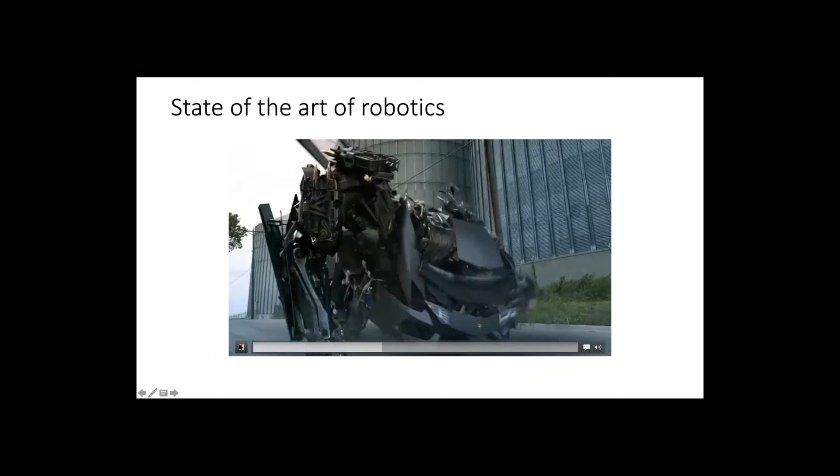So where's the state of robotics right now? It doesn't quite look like that. This is not how the state of robotics looks like right now. This is the fantasy in movies.

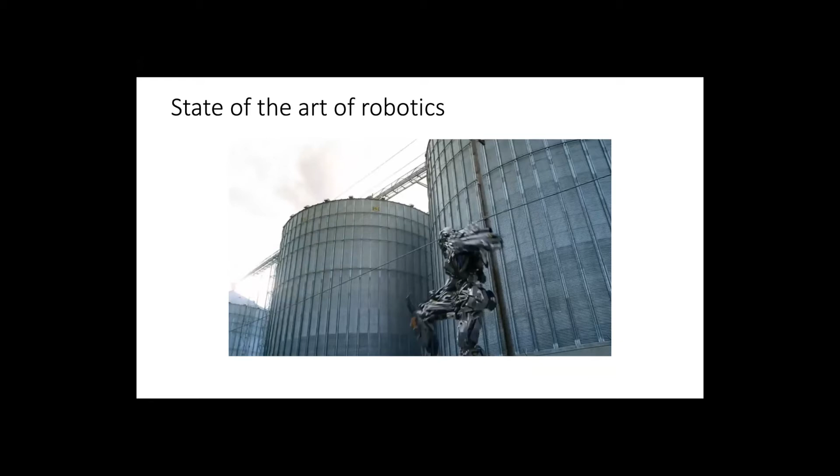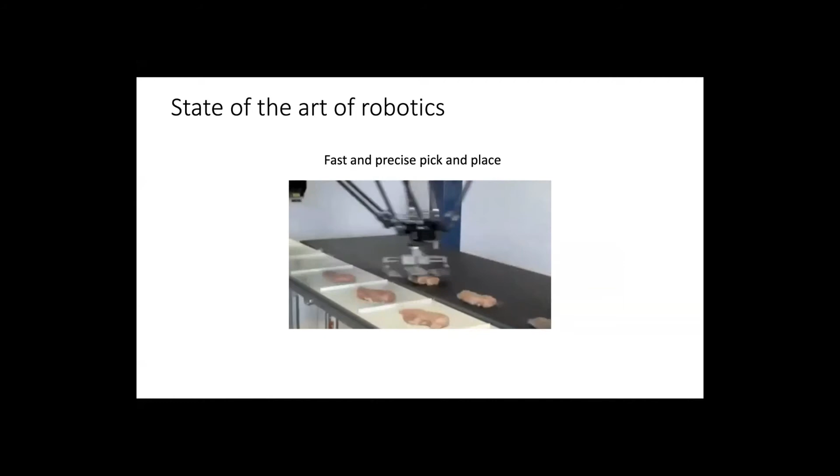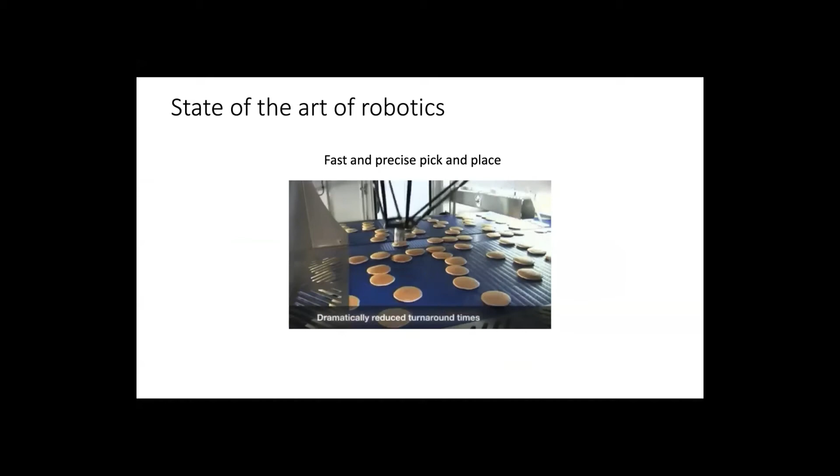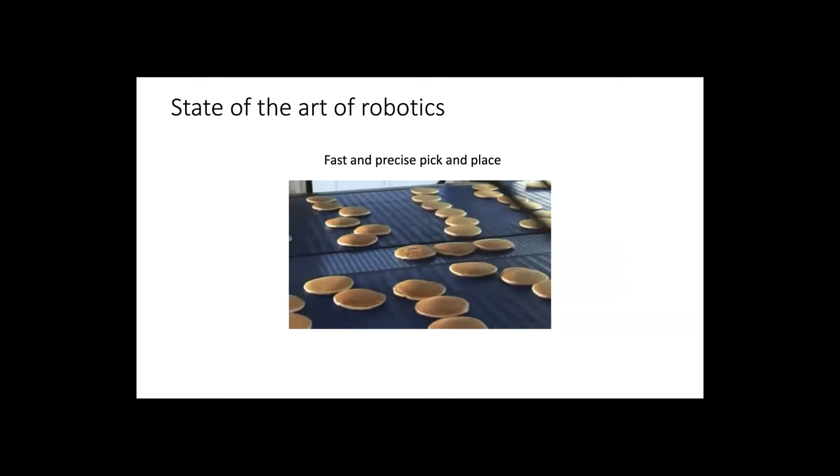Where we are is - this is actually already almost 10 years old, but it reflects the state - we are very good at fast pick and place. Pick and place works superbly, and we have perfected these things for automation, for manufacturing, for ordering, sorting, food industry. So pick and place works well.

More recently, this is what I've seen this year at the big Automation Expo in Anaheim, California, this year in February, shortly before the pandemic broke out. So you can see what's currently available for purchase. You have robot arms that are on mobile units. They can drive around, for example, in a factory floor. You have small robots, they're very precise, they can do very precise pick and place.

And then they can also take into account visual input to pick up something. We have sophisticated end effectors like this robot hand - those kinds of hands right now still more for research. Typically what you have in automation are end effectors like you see in this video, like a small suction cup to pick up something, or a conventional gripper, just a linear gripper that opens and closes. This is still the standard for many things.

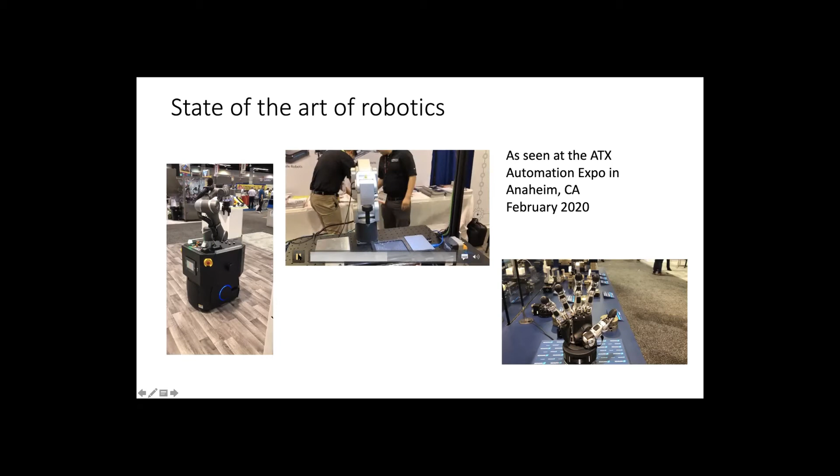And this is one area which is still very tricky - the flexibility of the human hand. Like in this robot hand, we still don't really have it to the point where it's really very reliable and at a sufficiently low cost for manufacturing. So what we do in practice is specially design end effectors, hands, grippers for a very specific purpose, like for example this needle-like end effector for picking up these tiny spheres here.

And then also right now what's happening - NASA built, you've probably seen these fantastic large rovers which are sent to Mars. So currently there's one right now on the way to Mars, about halfway to Mars. It launched earlier this year. And I've seen it being packed up - that's the image on the right, at JPL in February this year, February 6th or so, when it was packed up.

So you see the vehicle, the rover is there. These wheels, they seem tiny on the image, but they're massive wheels, like truck wheels. So this is a very large rover. This just got packaged up at JPL, and then the next day after that picture, it got shipped to Florida, where it was sitting for a while and then got launched in a rocket on the way to Mars.

So it's right now on the way to Mars. Yeah, this is very exciting. So these kinds of robots can drive around, and they have a robot arm, actually two kinds of arms. One is this mast here, which can look around and take pictures of the environment. The other one is a robot arm with a tool head with various different tools, for example, to drill into the ground and to analyze the soil properties.

Because the main question we're interested in is: is there life on Mars, or was there life on Mars, and what did it look like? That's very exciting, because there might have been a separate evolution of life on a different planet, separate from Earth. So there's a lot to learn from there. That's why people are very excited about this.

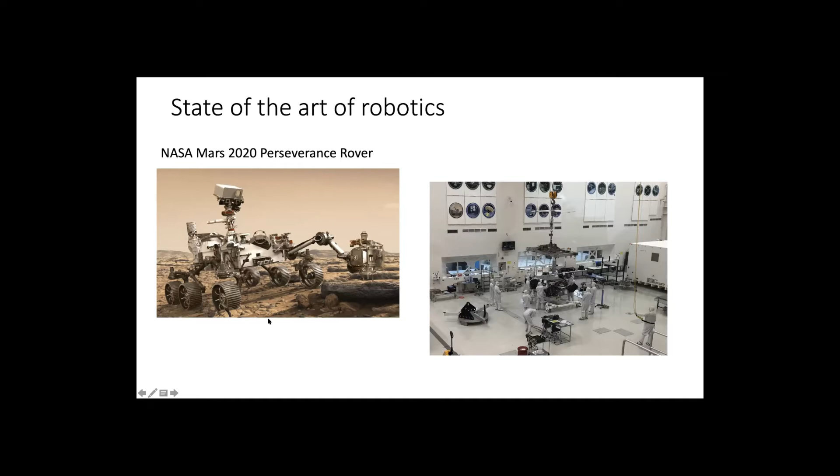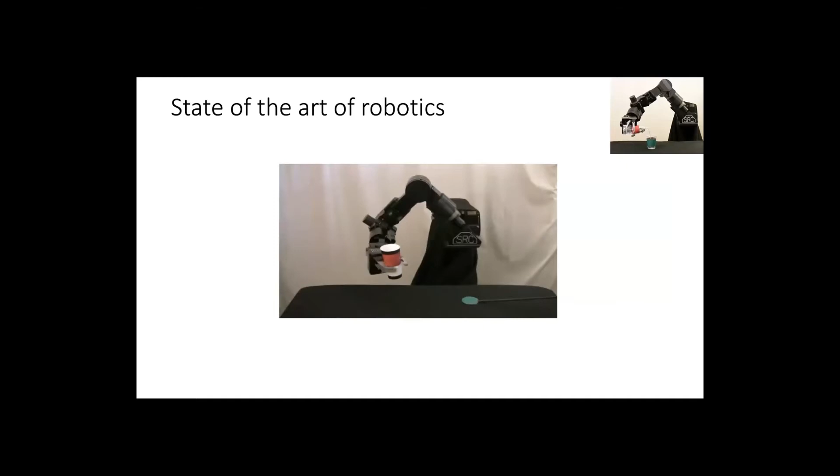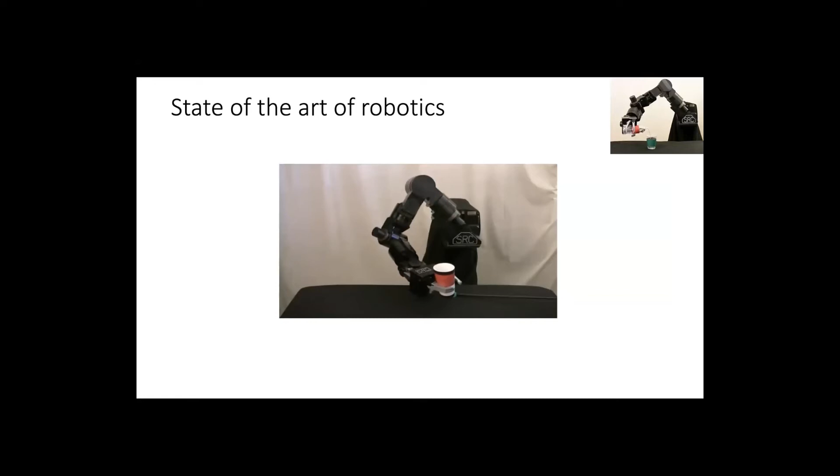So that's another example of the state where we are. So that's one example of what I worked on at USC, one of the works I was involved in. So we created motion plans to execute for the robot. And another thing here was we could create these plans that are very flexible, that adapt to changes to the goal point. And the goal point is here, this green sphere on the table. So we could move it around.

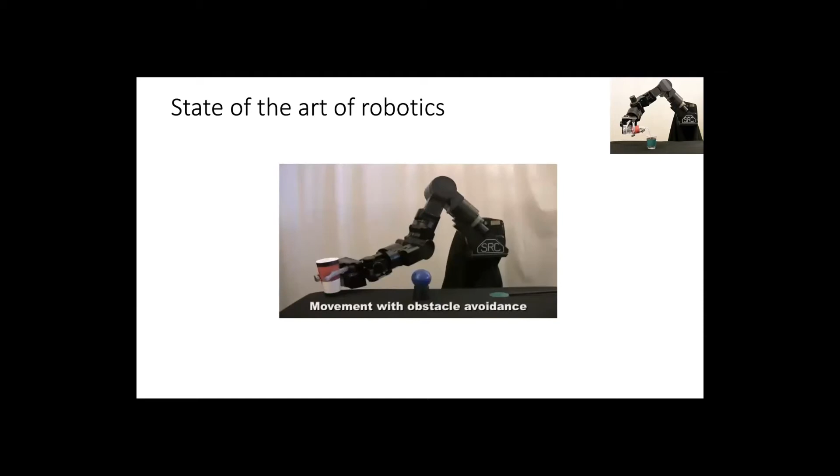So this is an example where the obstacle avoidance is turned off. But when you turn it on, it'll move around the obstacle. And next it shows some more examples of the robot avoiding the obstacle. So you see here how the robot moved backwards to avoid the obstacle, or upwards. And at the same time, the movement plan guides it to this goal, this green disk, and you see it'll adapt to the changes.

The neat thing here, you probably noticed this movement was fairly natural, like humans would move. And there's a reason for that, because we demonstrated this movement with a human, and the robot imitates the movement while at the same time being flexible to adjust to changes to the endpoint. So the new movement planner here can imitate your movement, but at the same time, while it's executing the movement, it's flexible enough to adjust to different endpoints.

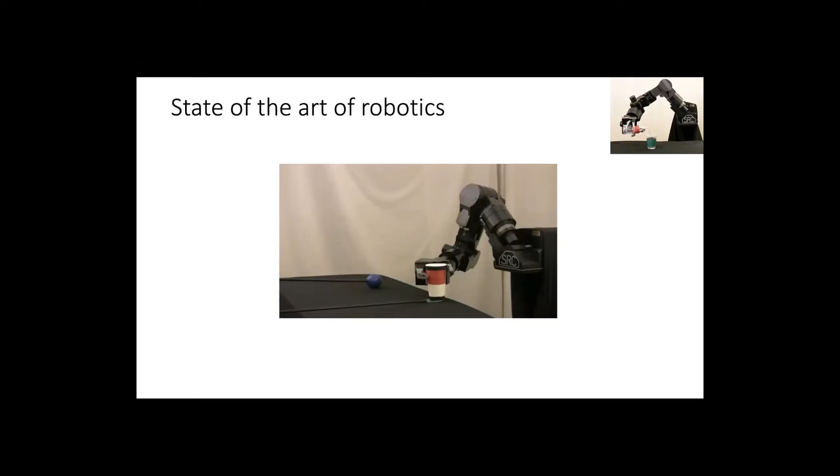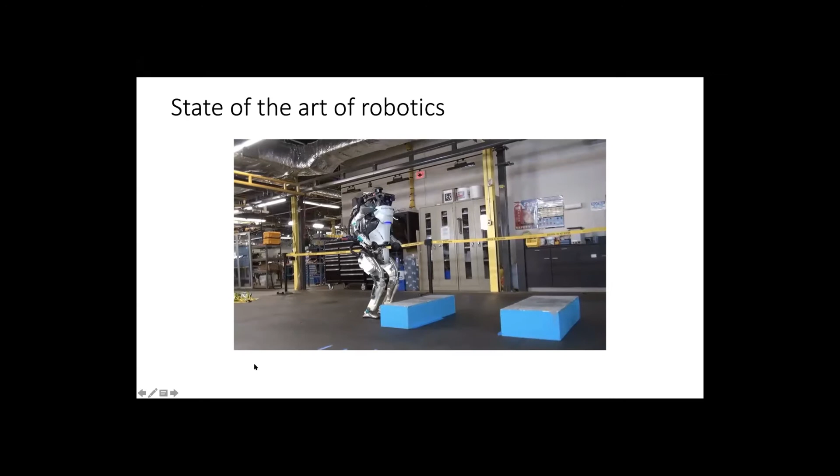And then this is more recent, about 3 years ago. Boston Dynamics is a robotics company, as the name says, in the Boston area. And they've done impressive work with fairly large robots, more on the mobility side, for example, 4-legged locomotion, or two-legged locomotion, as you see here. Yeah, that's quite impressive what they did.

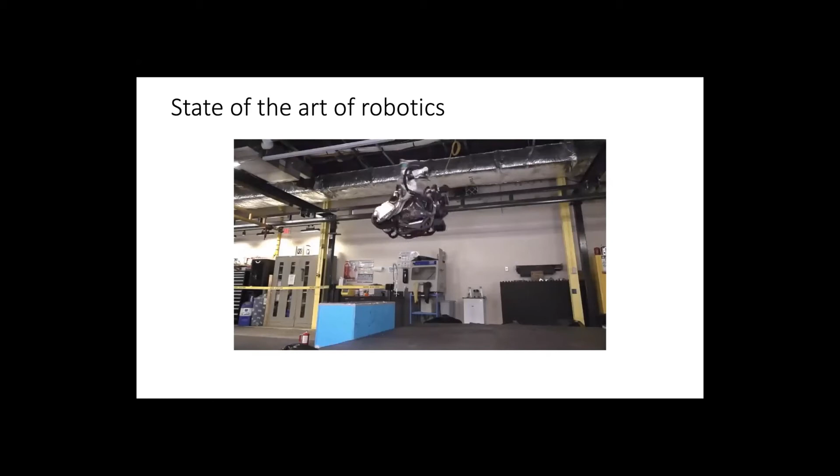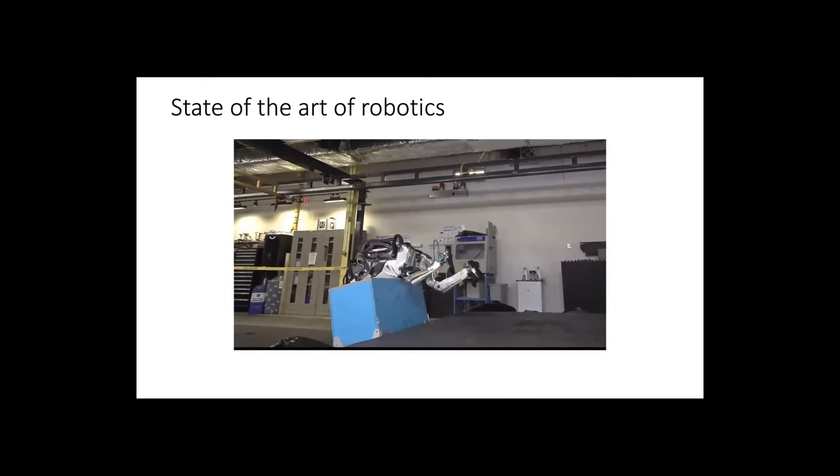But there's one important trick. It doesn't work that reliably. So what you do is you keep the camera running all the time and keep repeating, because sometimes it doesn't work, and sometimes it does work. So they've done an impressive feat just getting it to work, but having it reliably work is still another question. So for humanoid robots, it's still very hard to get them to work reliably, and that's why you don't see a lot of them.

So what is actually the cost of these systems? I mentioned Boston Dynamics. They have another robot, Spot Mini, which is now more on the commercial grade side. The big humanoid robot you saw is not commercial. You cannot buy it. It's just not reliable enough to sell, to put out there. But with the Spot Mini, there has been a lot of engineering over the last 10 years. So they got it to the point that it's fairly reliable, and it's like a little dog that can run around.

You can mount instruments on there, and you can imagine it running around in a potentially hazardous environment, let's say in a nuclear plant that got damaged and there's radiation around. It could run around there and take pictures. Or generally you could use it to monitor a site. It could go upstairs, downstairs, and they're now selling it for $75,000. Still, it's quite some amount. It's not cheap.

Then on the other hand, you have these robotic manipulators, like this example here by a company called Universal Robots. This particular version is called the UR5. And they typically have a price like $30,000, and this is also the price range you find with many industry robots, industrial manipulators, like the manipulators you see that put together cars, that solder together the cars, that paint the cars.

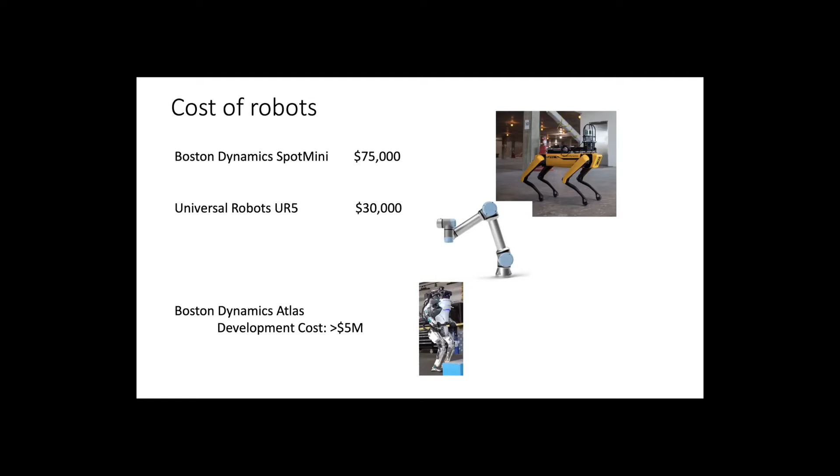Specialization essentially means I have a new task. Let's say I want to insert something into something else. And I need to design a specific end effector for that. Just the design, the prototyping and iterations easily cost $100,000. And so having something that's more flexible that you can use for more different tasks, and also something that's relatively low priced for the end effector, there will also be a market.

For the next section, I want to talk about what does it actually take and what skills do you need to make robots work. So let's have a look at one example. This is manipulation. Manipulation means you have a robot arm, and it does something on a surface, maybe picking up something. Or one example could be you pick up products and you put them in boxes. It's something that actually happens in distribution centers, you need to sort things, you need to store them away.

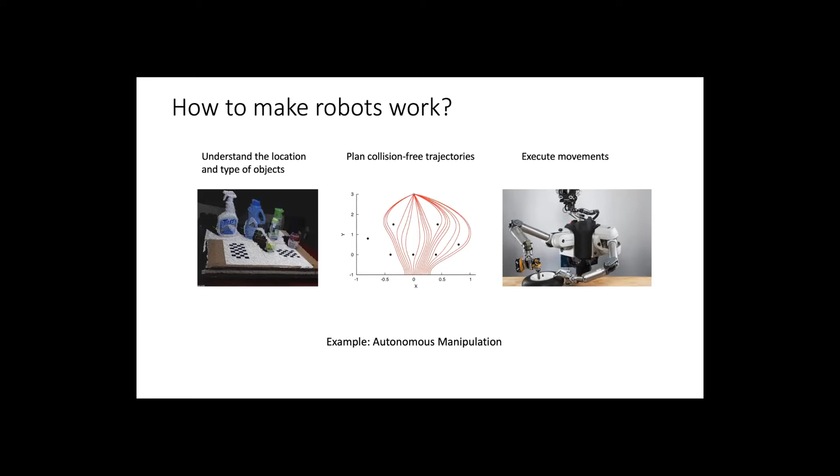It again involves a perception piece at the beginning. And again, it involves getting some estimate of the depth of the scene. I want to get a nice, local 3D landscape around the vehicle through my depth sensors. And then I can plan movements in this environment.

And then again, when we figure out the terrain, when we know where the safe spots to drive to are, where the spots to avoid are, it boils down to a planning problem. How do I navigate in this environment, right? So what you do is you plan many possible ways to drive through the environment. And then, in simulation, sort of in the robot's mind, you evaluate which are the good trajectories among these. And then you choose the good one, and you drive this way.

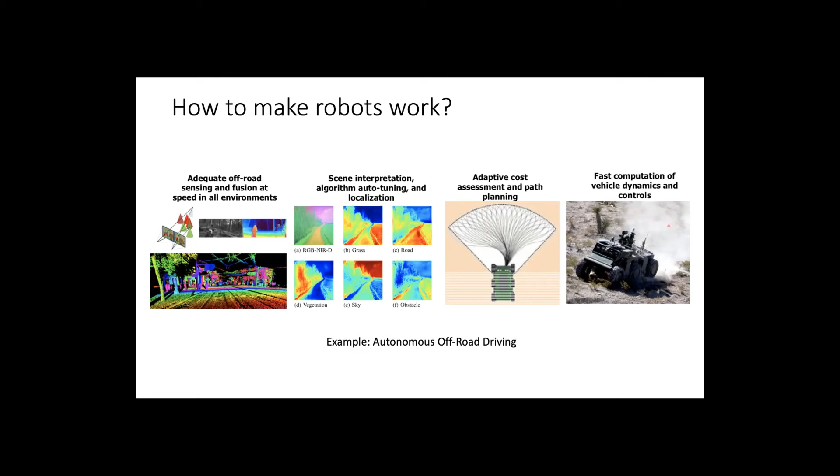Since you're now at this stage, you need to decide what you want to study, what to focus on. I want to tell you the key ingredients that are very valuable, that form a basis to work in this area. Number one is math. You cannot get around some level of math in this area, and the most important tool here is linear algebra.

The kind of math involved here is essentially matrix multiplications. It's all the field of linear algebra.

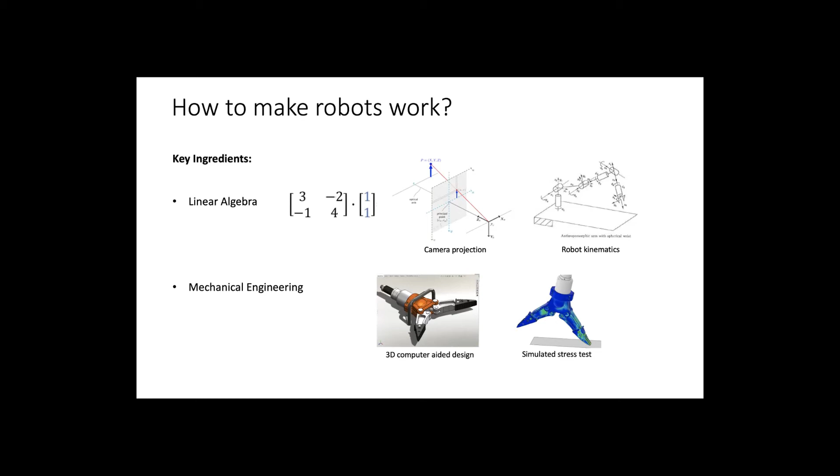So yeah, these are very nice tools. Also on the mechanical engineering side, it's very useful to have some artistic talents, because there's also aesthetics to it - designing a new robot, you want to make it pretty. So artistic talents are also very valuable here.

Then another key ingredient is computer programming. Programming is of course very key, and it's the whole brain of what makes robots work. On one hand we have the mechanical design and building the thing, but then we need some smarts to get the whole thing to work, and that's all done in programming - dealing with sensor input, camera input and how to process it, how to send commands to the motors, and how to deal with all the communications with the different sensors and everything. Everything is done in computer programming.

For robots, in my impression, the most popular language is C++, because it's closer to the machine level. Also, if you compare it with other languages, you probably heard of at least some of you know about Python.

C++ code is directly converted into machine code, and therefore closer to the kind of things the machine can handle, and faster than Python code. So if you're into robots, I think there's no way around C++. C++ has been around for a long time, much older than 20 years, but in this area at least, it's been used in robots for at least 20 years, and it hasn't really changed despite the many changes and despite new invented programming languages. People still use C++, so I expect it to be still valuable in the future.

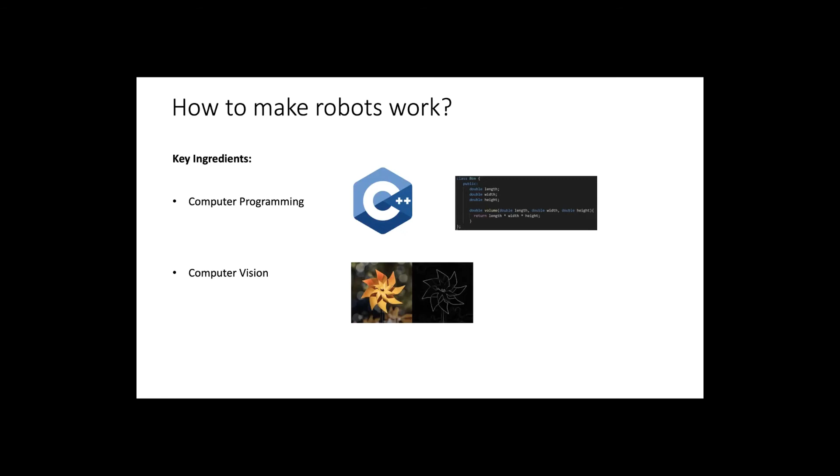But then you want to do more things. You want to locate where things are in an image. You want to locate or identify what's in the image - do I see a car in the image and so on? This brings computer vision very close to a more popular area these days, machine learning. I went to the number one computer vision conference over the last three years or so, and computer vision and machine learning is like one thing.

These days, computer vision is all about machine learning, because what you do is you take tons of data - let's say millions of images - and you have labels for those images. So you have images of cars, images of pedestrians, images of bicycles, millions of them, each with a label telling you which is which. Then you use machine learning algorithms to predict what is the thing in the image. I give an image of a car and predict it's a car, or I give an image of a bicycle and predict it's a bicycle.

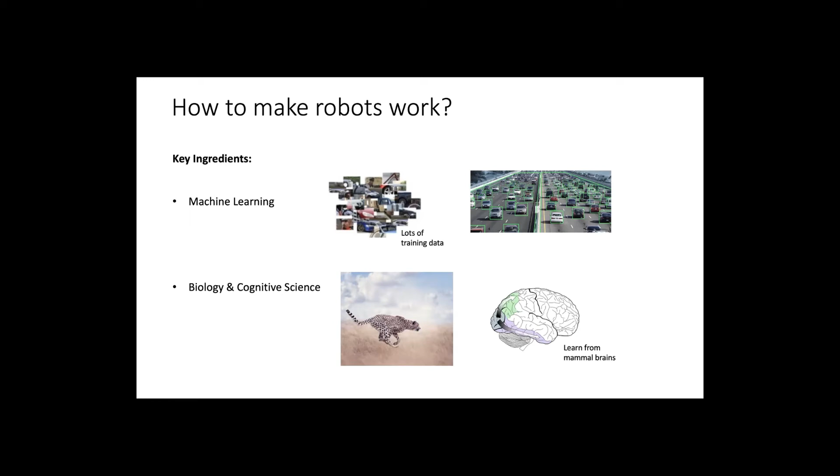There's a famous quote by the physicist Richard Feynman. He was at Caltech, and one of the things he had on his board was, 'I do not understand what I cannot create.' That holds true for many things, right? Especially if we look at biology, the human brain.

As long as we don't know how to build it, we don't really understand it. Then, the last two important points here: to make robots work, it's a lot of testing. You just need to test over and over again. And you also need to test in the real world, because while simulations get better and better, we can only test some aspects in simulation. Like I showed you before with this stress test simulation, some things we can do in simulation, but at the end it's so complex, so many different parts, and the interaction with the environment, bumping into things, real world vision and everything is so hard to simulate.

So at the end it boils down still to this: there's no way around a lot of testing with a robot. You do it over and over again and try to improve it. So that's a big time effort.

It's very important. And finally, teamwork, since this is an interdisciplinary effort. You've seen it involves mathematics, biology, mechanical engineering, computer vision, machine learning, and all those fields together. Rarely does anyone have expertise in all of them. So it requires good teamwork, which means one very important skill is good communication, being able to communicate the vision and facilitate communication within the team to make something work. So communication is key, and teamwork is key for making robots work.

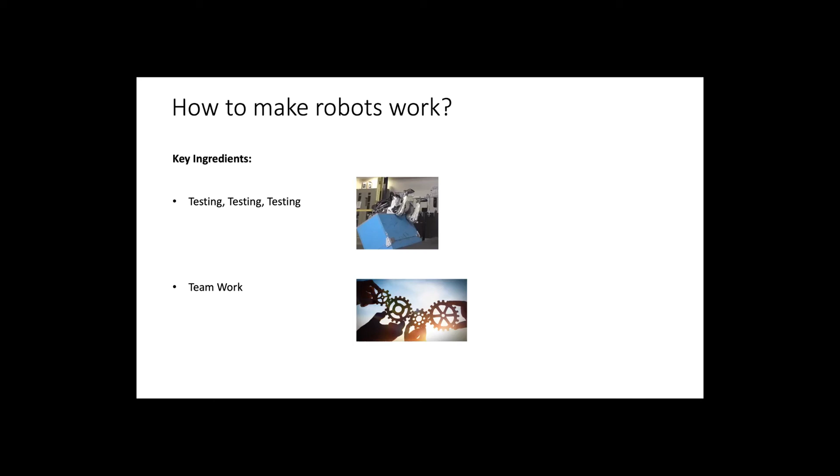So to summarize the key ingredients, we need mathematics, right? It's just the basic. Sometimes in school, and I had the same experience myself, if you see the school homework and problems, they don't feel very much related to real world problems. But working in this field, there's so much need for linear algebra, matrices, vector multiplication and manipulation. It's very valuable, so it's good to have a good background in that.

Then mechanical engineering, right? We need computer programming, it's key. Everything is software, right? And if you're good in software, you have a lot of opportunities because it's not restricted to robots. Everything these days, a lot of things are based on algorithms and software.

And then in particular, computer vision and machine learning are key here. Then biology and cognitive science are great for learning, for getting new ideas. And then finally, lots of testing and teamwork. So these are the key ingredients to make robots work.

So now we're almost at the end. So where are we going from here? How does the future look like for robots?

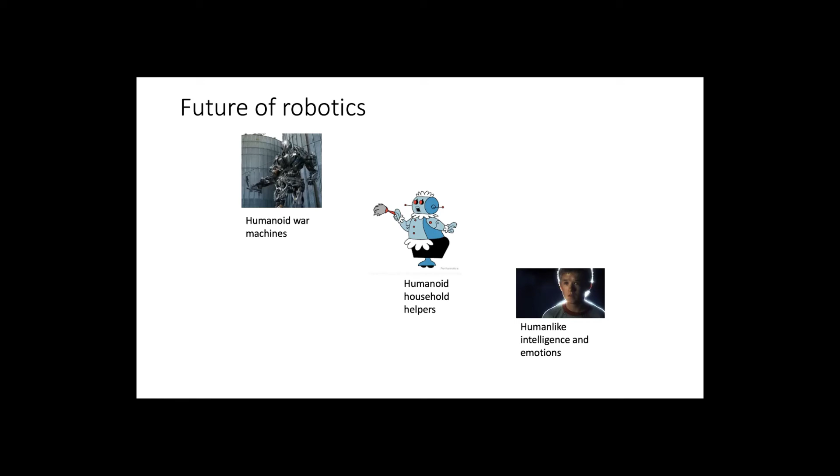Looking at the movies or Hollywood, it seems like humanoid war machines have been very popular. Humanoid household helpers too - this is one in the center, you may not know because it's a very old TV series from the 60s called The Jetsons, and there was one robot, Rosie, who was very famous. It's a household robot. And then finally, human-like intelligence and emotions. All this has been very popular, and interestingly, almost always in some humanoid form or with very human-like qualities.

But that's not really how the future, at least in the next 10 years of robots, will look like. It will be none of these, and they've been in the movies for 100 years. I think the early movies, probably 100 years ago, already had some visions of robots along that line, but it's still not in our life, and it's not going to be in the next 10 years.

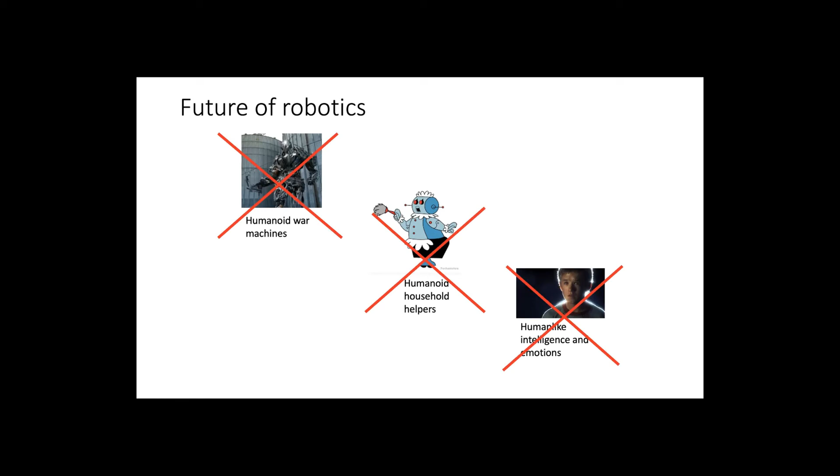And in the 80s, I know colleagues who thought in the 80s we'd have autonomous driving within the next few years - still didn't happen. There have been these predictions for the last 50 plus years that autonomous driving is just about to happen. It never happened.

But the last 5 years has been a little bit different. There's been a lot more investment. All major car companies have a huge autonomous driving effort, big investment. And with the machine learning progress we saw in the last years, with the computer vision progress we saw in the last years, it seemed to be a lot more likely to happen. We've seen at least demonstrations that a car can drive 50 miles or so without touching the wheel, or almost never touching the wheel. It can navigate traffic, can drive pretty well, probably better than many humans.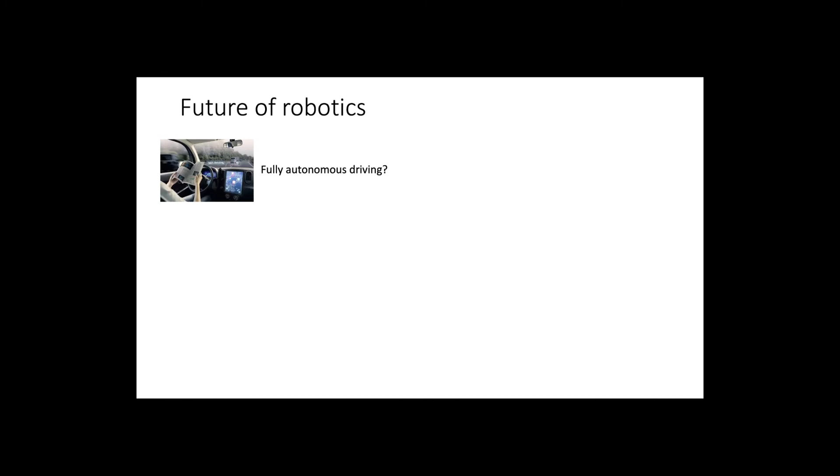So it's one of the things that might be possible within the next 10 years, but there's still a question mark. But I'll tell you other things that I think will happen.

One thing is we'll see fully autonomous warehouses. These are warehouses, for example, for distribution centers. Amazon, as one example, has a lot of distribution centers where they collect all the items and then package them and ship them out. There's a lot of automation already happening - for example, they have robots to move around bins, robots to pack packages. But there's still a human in the loop here and there, and it's not fully autonomous.

And that's something that's been identified in the industry as a sort of low-hanging fruit - something that is doable. It's not there yet, but it is doable, because it's a more controlled environment. I have my warehouse, I can control the lighting, I can control the robots in there, and I can control the items I'm working with. Most of the time, I'm working with boxes, which have a nice, very controlled shape. So geometrically and visually, it's much more controlled. For that reason, I think it's something that will happen - we'll have fully autonomous warehouses, not just partially autonomous ones like we have now. We will get fully autonomous ones that can operate on their own for delivering stuff and online delivery.

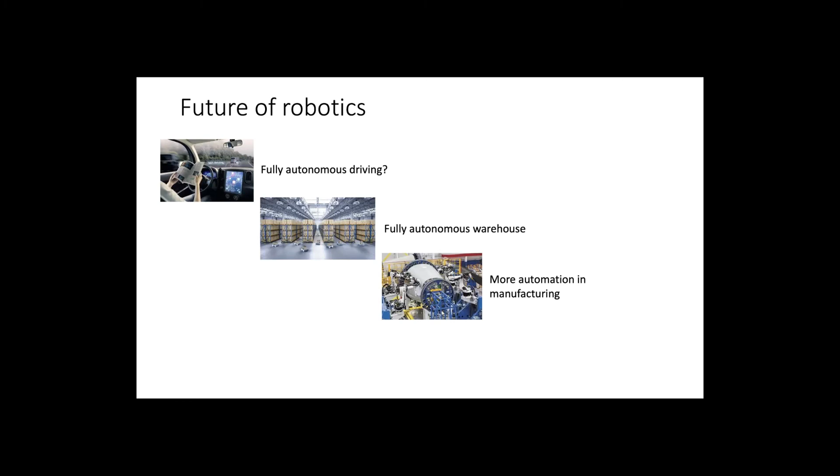Then we'll have more automation in manufacturing. There's already automation in manufacturing, for example, in the car industry. Welding together the aluminum plates into a whole car body is done by robots. Painting the shell of the car is done by robots.

But then we still have a lot of humans that put in the different components into the car. And so we will see more automation also in this area, as more and more of these individual jobs will be done by robots. It will first start with things that are very structured, manipulating things that are more rigid.

Manipulating soft tissue is still very hard. We know how to pick up something that's soft, but then placing it in a location that we exactly know where it's supposed to be, let's say it's part of a seat, and placing the soft cover in a way that it's really in the right location, it's still very hard. But we'll see more effort along this line.

One of my projects is working on automation in manufacturing, to make something autonomous, or make it work in an automated way that's still done by humans, manual labor right now. And there's been a concern, right, robots taking over some jobs, but on one hand it doesn't happen quickly.

On the other hand, there's always a gradual shift of the kind of work that we do as humans. We don't do the same kind of work people did 100 years ago, and some of the things involved like shoveling coal or dealing with big steam engines. For the most part, we're pretty happy that we don't need to do this work, because a lot of that work was pretty dangerous, and work-related accidents have gone down.